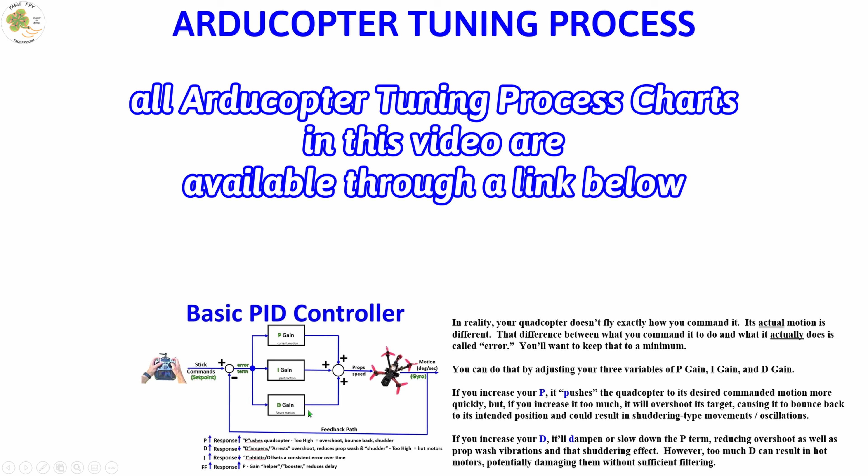So here's the basic Arducopter tuning process we'll be going through. First, we're going to start with the default PIDs that are provided in Mission Planner for 10-inch quads. Then we're going to do a little magic with our keyboard by pressing Alt-A. We'll adjust some parameters and conduct a hover test flight to see if we have any noticeable significant oscillations. If so, we'll adjust our PIDs if necessary.

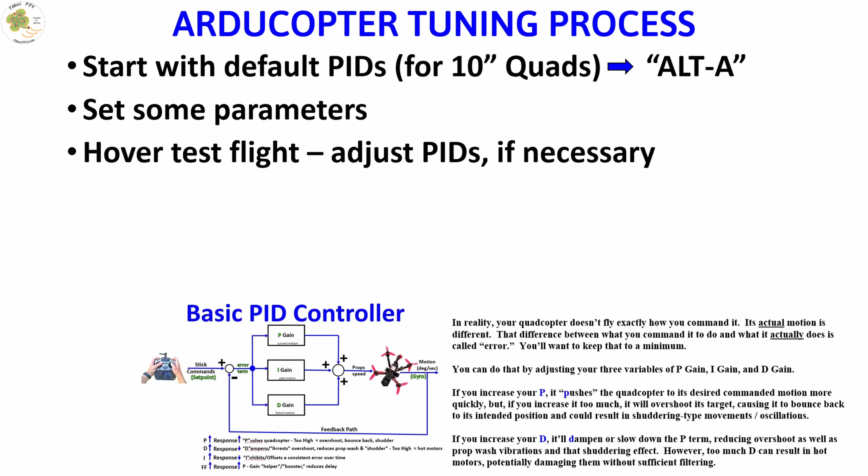Then we'll conduct an altitude hold test flight because we'll use that for our auto-tune, and again adjust any parameters if necessary. Then before we do our auto-tune, we're going to do one last test flight to see if our quad is able to self-level, because that's going to be important also for our auto-tune. Then we'll use the ArduPilot Autotune feature, which will automatically adjust our stabilized P term and also our rate P and D terms, along with our rotational accelerations.

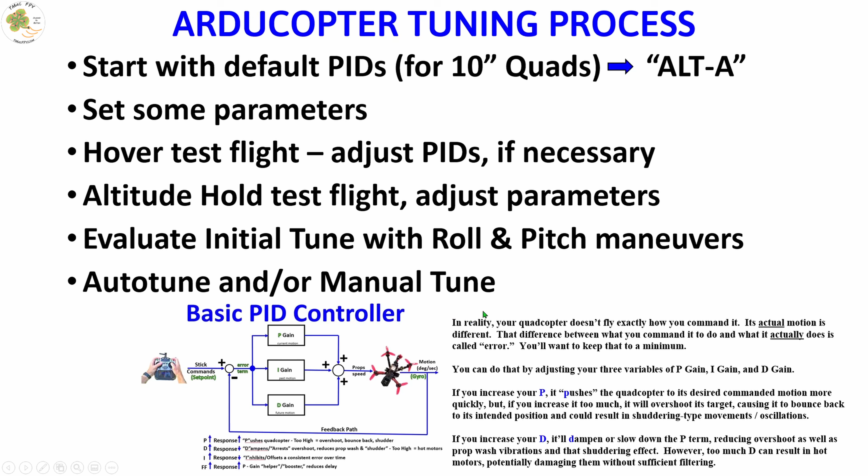Autotune could result in a tune you're happy with. However, more than likely, you're going to want to tweak a few of the values. So I'll go over a few of the tools in Mission Planner I used to manually tweak those values and come up with my final tune. As I mentioned, we'll start with the default PIDs. So let's go ahead and take a look at those.

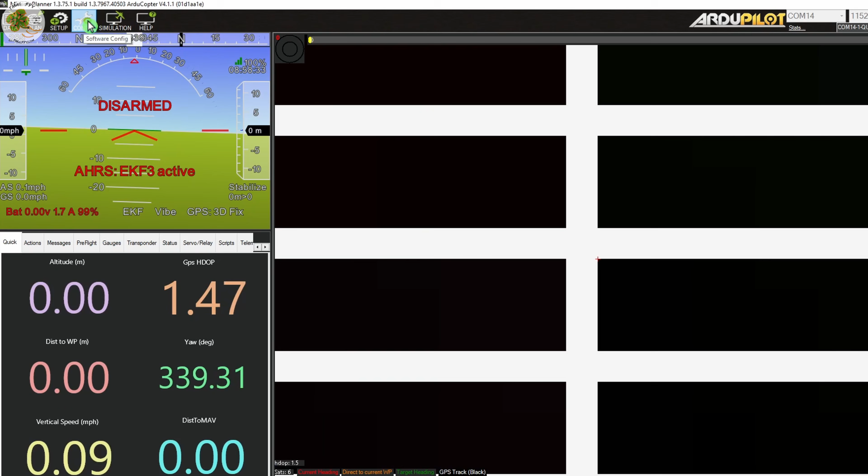With our quad connected to the computer through a USB cable, we go to Mission Planner, Config, Extended Tuning. These are the default PIDs and other values loaded into our Arducopter firmware. These are designed for a 10-inch quad, specifically the 3DR Iris. These may work well enough for you to perform an autotune, depending upon the size of your Arducopter. However, before jumping straight into an autotune, I'd highly recommend performing those other preliminary pre-autotune steps we just talked about, and I'll demonstrate here shortly.

Since we're using a 4-inch Arducopter for this video, I know I'm most likely going to have to change the PIDs from these 10-inch defaults. So what I've done for you is create this chart of example basic initial PIDs for Arducopters of different prop sizes, which should be a good starting point for an autotune. Of course, we'll still need to go through the pre-autotune steps we mentioned earlier to verify that they work.

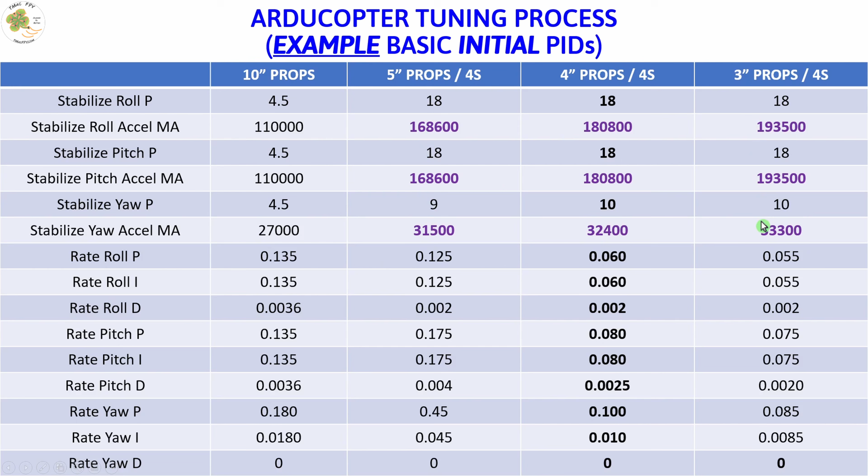I also want to point out there's a reason that these values are highlighted in purple. If we go to our next step, we also have Mission Planner keyboard Alt-A highlighted in purple. That's because when we connect our quad to Mission Planner, go to the Data tab, and on our keyboard press Alt-A, we get a pop-up window for a plugin designed by Andras Schaffer.

This little widget asks you a few questions about your prop size, battery cell count, max and min voltages. With that information, it automatically produces those values we saw earlier, highlighted in purple.

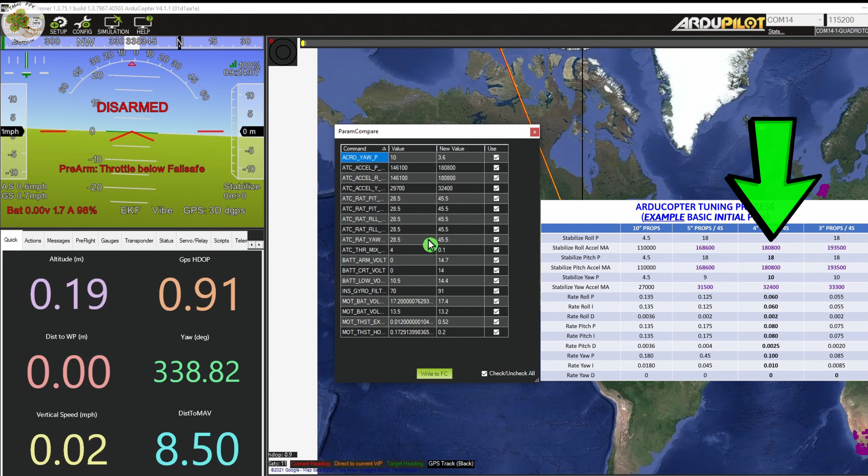Then all you have to do is click on the right button instead of searching for the parameter in the full parameter list and changing the values there. It's a real time saver. In fact, it updates more than just those values we saw highlighted in purple earlier. It also updates these we see on our next step, and some others we'll see later on.

This Alt-A plugin is currently being incorporated into the mandatory hardware setup section for the latest beta release of Mission Planner. So in the future, you won't even need to do Alt-A anymore. It'll be part of the initial setup process.

So now that we've updated some of our parameters using the Alt-A plugin, we still need to update some other values on our example PIDs chart not highlighted in purple. To do that, we go to our Extended Tuning tab in Mission Planner, change the values here, and then write the parameters.

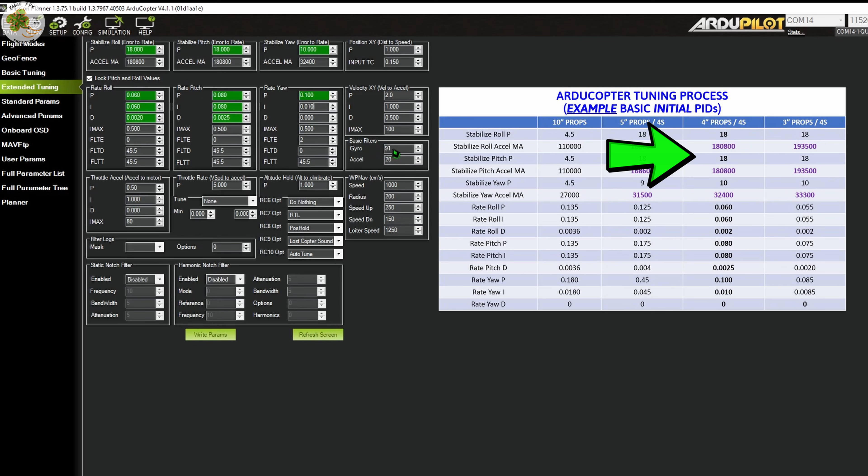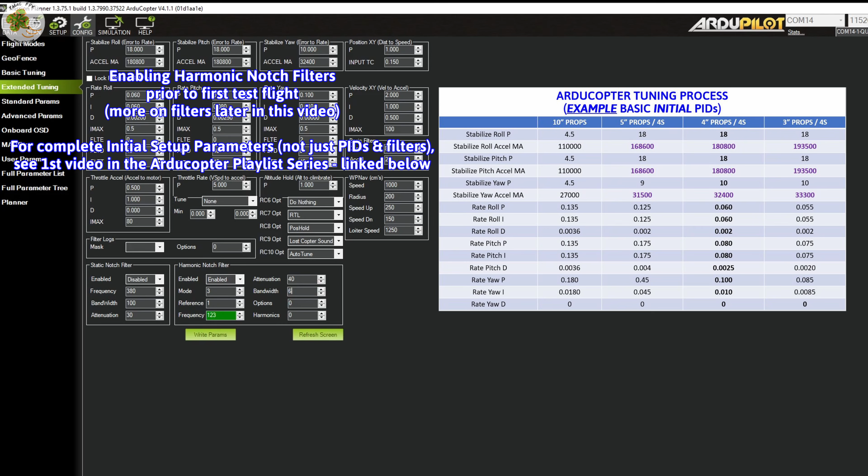Our next step is to conduct a motor spin test to determine our motor spin arm and motor spin min values. So let's go to Mission Planner, Setup, Optional Hardware, Motor Test. With your props off and the quad connected to Mission Planner through your computer, we're going to see the minimum throttle percent needed to spin the motors cleanly when the quad is armed just by changing these percent values up here.

Usually it'll be about 4 to 5%. You may want to bump it up just a little bit since the motors aren't spinning any props during this test. So we'll start at 5% and test motor A. And that spins fine at 5%. What if we dropped it down to 2%?

That works at 2%. What about motor B? Not so much. So we need more than 2%. Let's make it 3. 3 works for motor B. Works for motor C. And it works also for motor D.

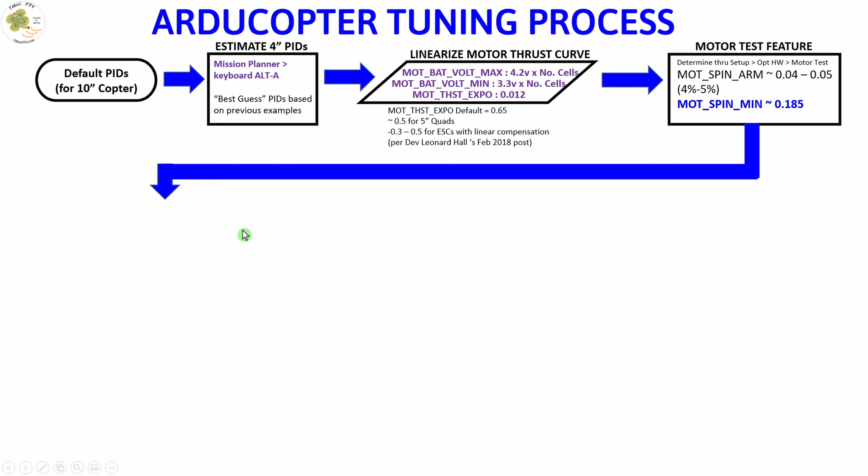Our next 3 steps consist of changing or verifying some parameters before we do our first test hover flight. Fortunately for us, the ones highlighted in purple have already been done through the Alt-A plugin we used earlier. The ones in black text are default values, which we're not going to change. So the only ones we need to do anything with are these parameters in blue text.

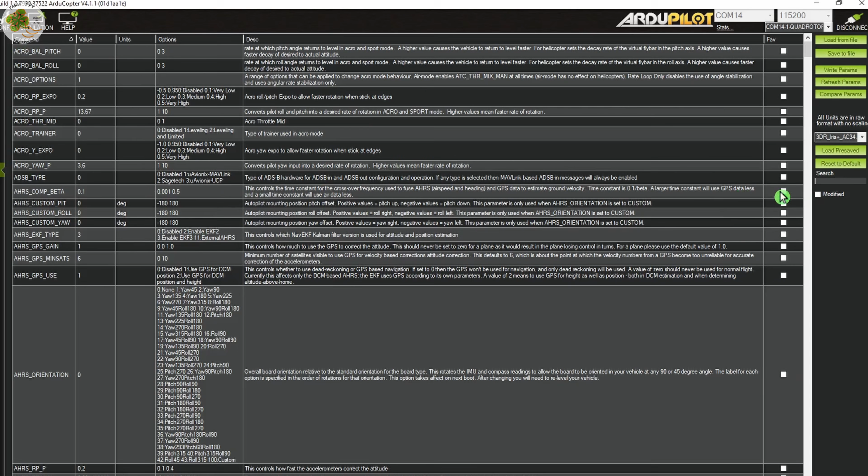First, we'll quickly look at these 5 using the Mission Planner full parameter list search bar with our Arducopter connected to Mission Planner. We just need to type in the first few characters of the parameter and it'll show up like that. Change the values and click Write Parameters. We'll do the same for motor thrust hover, where 0.20 was the default for our Alt-A plugin. I'm going to change that to 0.15

for our 4-inch Arducopter. By the way, this range of options is not hard and fast. These are what's highly recommended. However, you can go outside of these if you so desire. Yes. Yes. And then the last 3 with motor spin, I've already made the changes.

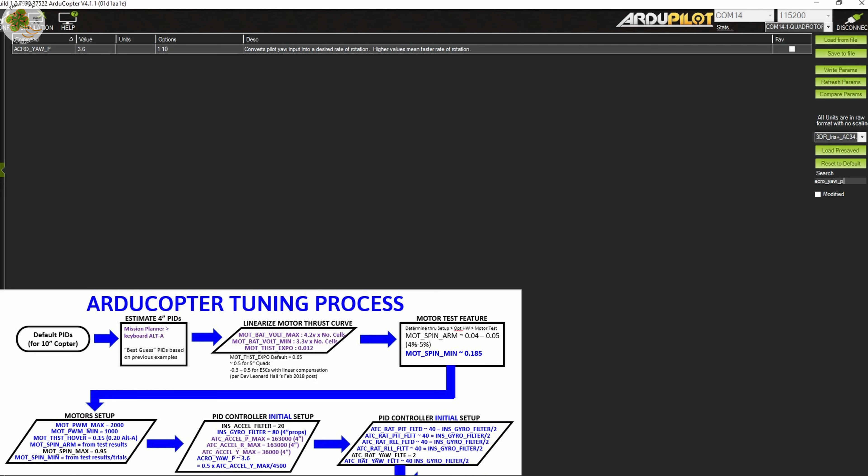While we're here in the full parameter list, we'll go ahead and do the Acro yaw P and verify that that is set to 3.6, which is what we want. It doesn't hurt to write parameters. And now we'll change these other parameters by going to our Mission Planner Configuration Extended Tuning tab and fill in our INS gyro of 80.

And then these 45.5s end up being 40, and our yaw FLTE is default of 2. So we just change these 45.5s to 40, which is half of our INS gyro frequency. And then we click Write Parameters, and let's go ahead and refresh them just to make sure that they've taken. And we see that our changes have been saved.

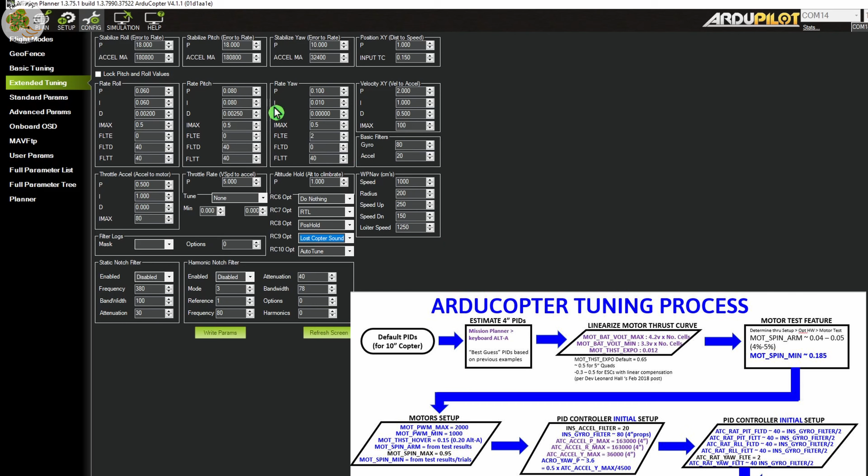Now it's time for our first test flight with our ATC throttle mix man set to 0.1, and we can verify that through our full parameter list that we were just in. We'll take her outside, take off in stabilized mode to an altitude of about 1 meter, and perform some small roll and pitch movements to look for any significant oscillations.

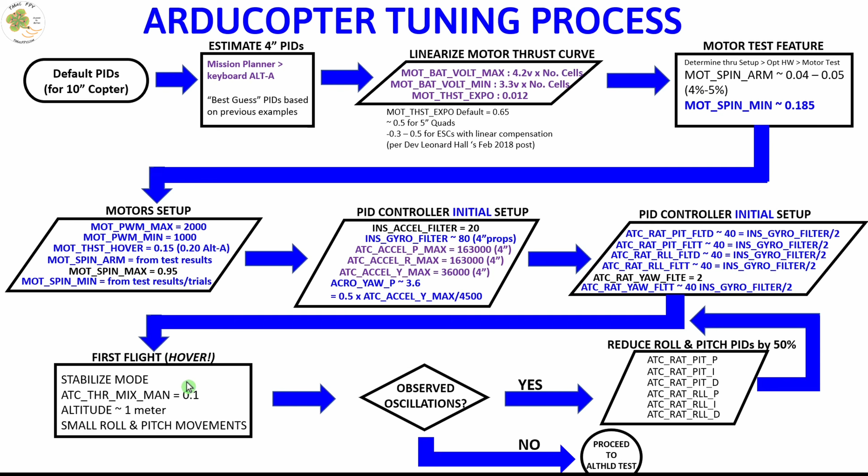If we don't have any, we can go on to our altitude hold test flight. If we do see significant oscillations, we'll reduce our roll and pitch PID parameters through the extended tuning tab by 50% from their current value and re-accomplish the hover test flight until we don't have any significant oscillations. All right, this is our hover test. I'm going to switch into stabilize mode.

Then I'm going to launch and gain altitude to about 1 meter. And we're going to check to see if we can hear or see any oscillations when we do some small pitch and roll maneuvers.

Sounds real smooth. Pitch maneuvers, roll maneuvers. And I don't hear or see any oscillations. That's a good sign. That tells me we're ready for our altitude hold test.

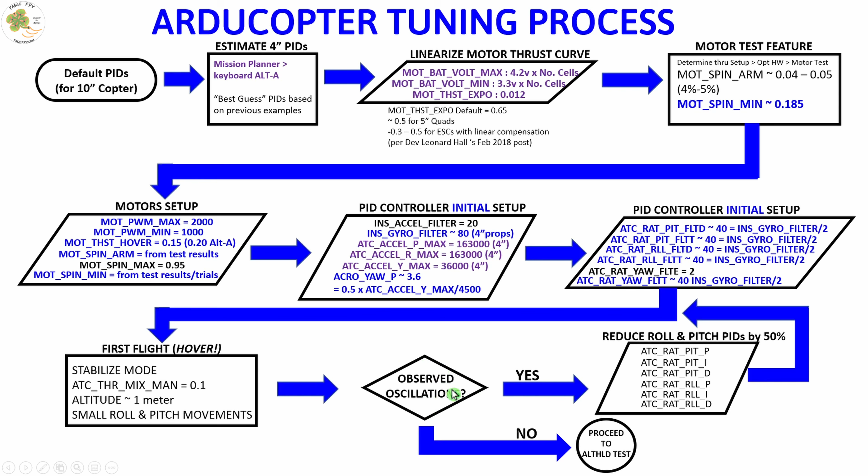Nice. All right, as I just mentioned, since we didn't observe any oscillations, we're ready to proceed to our altitude hold test. For our altitude hold test, we're going to need to set this parameter MOT_HOVER_LEARN equals 2. That's right, ArduPilot, specifically ArduCopter, has the ability to learn your throttle hover value, which is pretty amazing stuff, I think.

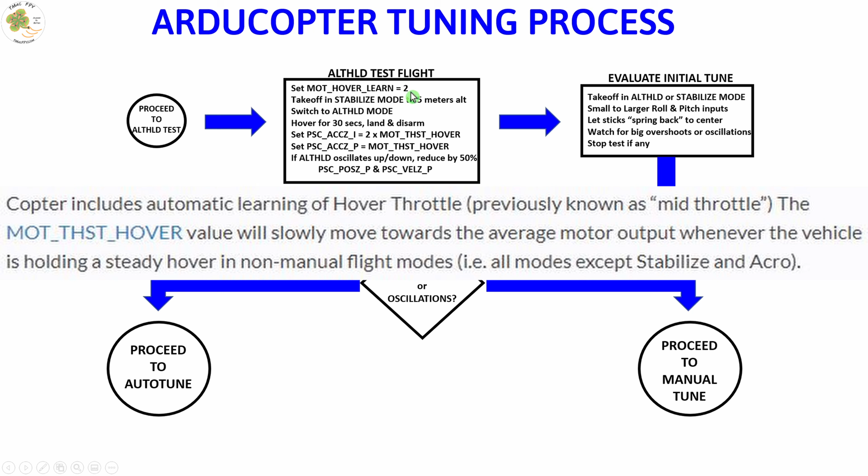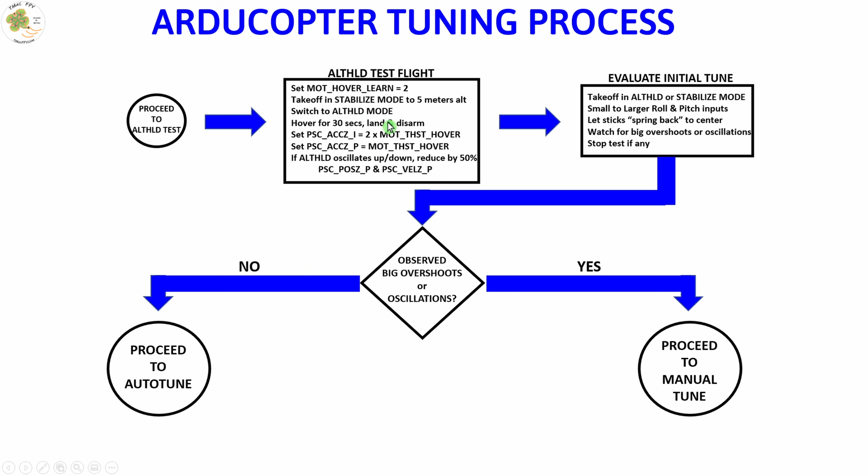We'll take off in stabilize mode to about 5 meters in altitude, switch to altitude hold, hover for about 30 seconds, land and disarm, and then we'll come back and set these two parameters also. If during this test flight we have oscillations vertically, then we'll reduce these values by 50% from what they were originally. In order to set any of these parameters, we go once again to our Mission Planner config full parameter list. Let's go ahead and do that now.

All right, since we've done this a few times before, we already know how to do this. We go to Mission Planner, config, full parameter list, search bar, MOT_HOVER, and it should come up, and it does, and we set this to 2, which is learn and save. Then we hit write parameters. Yes. Outstanding. Time for our altitude hold test.

All right, I'm going to launch in stabilize mode, get to an altitude of about 3 or 4 meters. It won't be 5. I'll switch it into altitude hold mode, and you should be able to see the altitude in the lower left-hand corner of the goggles DVR video. I'll hover for about 30 seconds or so, come in and land, and then we'll switch the parameters that we talked about earlier. I'm going to put my goggles on with my fat strap goggle strap.

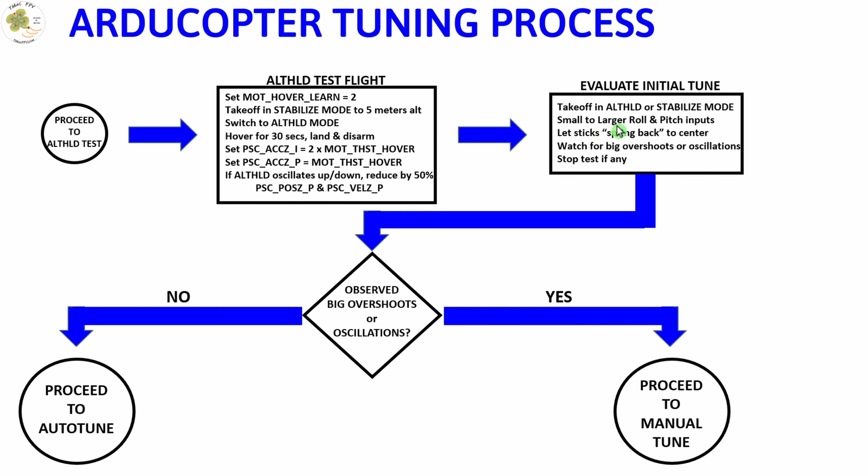All right, now we're ready for our self-level test flight. I'm going to take off in stabilize mode, get to a certain altitude, switch over to altitude hold mode. Then I'm going to input some roll and pitch maneuvers to make sure that the ArduCopter can snap back from those maneuvers, because that's the exact type of maneuver that Autotune is going to be using.

Here we go. Doesn't seem to be oscillating at all, which is good. Seems to be self-leveling fine. So we'll go ahead and set her down. Get ready for our auto-tune configuration.

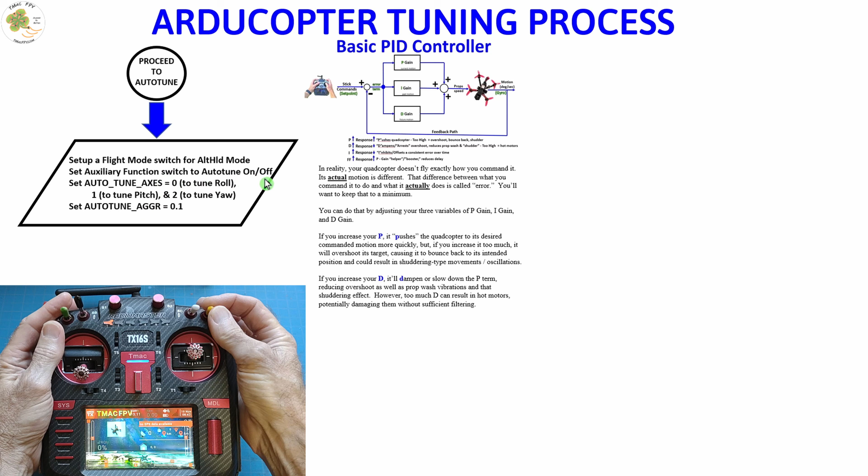Since we didn't have any significant oscillations during self-leveling, we're ready to go on to our auto-tune setup. We need to make sure that we've got a flight mode switch set up for altitude hold, which, as you saw earlier, we do. I went over how to set up flight modes in the first video of this playlist series. We're also going to need an auto-tune on-off switch. I've got mine set up in Mission Planner as an auxiliary function using channel 10.

To set up an auxiliary function on a channel, we go to our ArduPilot.org site, auxiliary function section, and we see the parameter we want is RCx_OPTION equals whatever feature we want from this long list. The X in RCx_OPTION is the channel number you'll be using. In our case, we'll be using channel 10, so our parameter we want to set is RC10_OPTION equals 17. How do we make that happen? The same way we've been setting up most of our other parameters, through the full parameter list search bar.

Now, of course, we also need to set up the switch in our transmitter, and you do that just like you would any other switch. Here you see my transmitter mixes page. Channel 10 is displayed as auto-tune. When I press to edit this channel, the next screen shows what I've filled in. I'm using switch D for my auto-tune switch, and I've set up a weight of -100 only because I want the channel high position of around 2000 in our radio calibration tab of Mission Planner to be when my transmitter switch D is in the forward or up position.

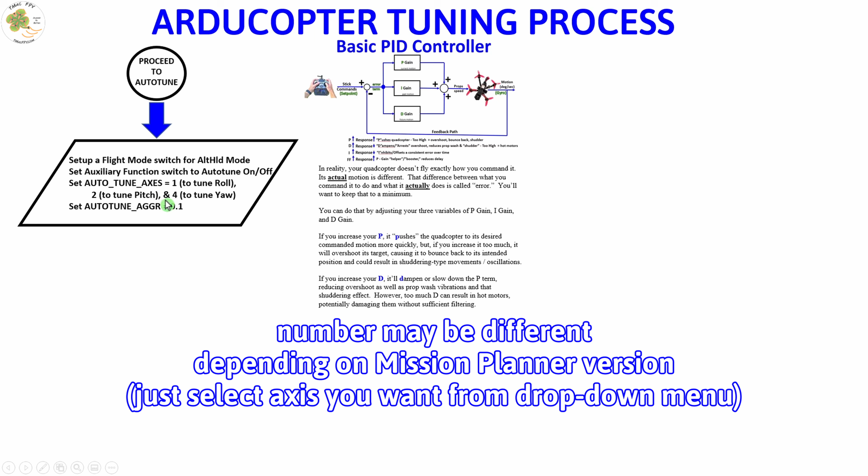This next statement talks about a parameter we need to set for which axis we want to tune during a specific flight. Now we could attempt to do all 3 axes in one flight. My recommendation is not to attempt that unless you're capable of flying with a very large capacity battery. Each axis can take several minutes to auto-tune, so I do one axis at a time. The process is exactly the same for each axis, with the exception of changing this number for the parameter. If you set the parameter equal to 1, the ArduCopter will twitch on the roll axis, which is a series of quick, short roll maneuvers. If you set it to 2, it'll twitch on the pitch axis, and so on.

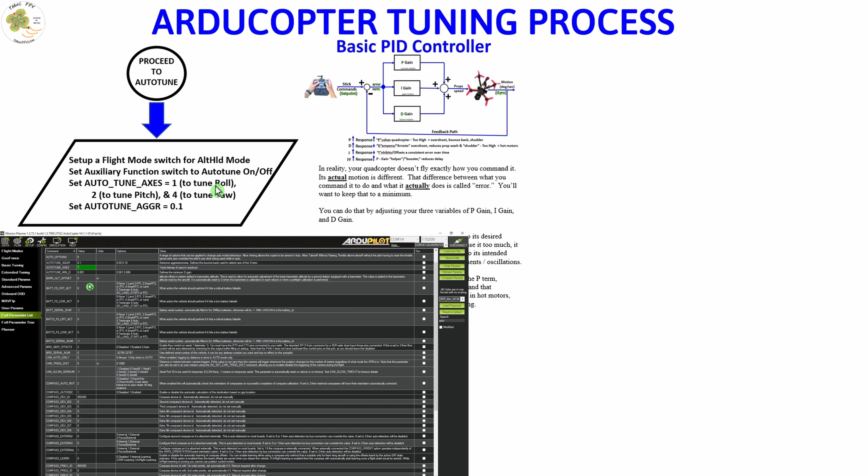Since the ArduCopter Autotune process is exactly the same for all 3, I'm only going to demonstrate one of the axes. For this video, I'll demonstrate the Autotune on the roll axis. So we'll go to our full parameter list and set Autotune axes equal to 1. And while we're there, we're going to ensure our Autotune aggressiveness parameter is set to 0.1. You could pick another option if you wanted to. Now that we've set up our parameters, let's take a quick look at the actual process we're going to do.

First of all, the ArduPilot site says to perform the Autotune with little to no wind in a large open area. They really mean that. Let me tell you why. During the Autotune process, when your ArduCopter is twitching, which are those series of short, quick maneuvers on each axis, it's going to drift. Every time you maneuver it with your sticks to keep it from drifting too far away, the Autotune stops. It will not restart until you let go of the sticks. If you're having to do this a lot because of wind, you won't be making any progress with your Autotune while your battery is running out of charge. I've actually gone so far as to schedule when I was going to do an Autotune based on the wind conditions by using a site called windy.com for my location.

You just type in your zip code or the name of the town you're in, and it gives you the wind forecast down here below. Just plan on doing your Autotune with as little wind as possible in an open area.

We're going to launch in either Acro or stabilized mode with our Autotune switch off. Then we'll go into altitude hold mode at a comfortable altitude. We'll flip the Autotune switch on and let go of the sticks. It'll start doing its thing, and you'll see progress messages on your goggle screen, or I suppose ground station if you're using one of those.

When it's finished, it'll say success, and all you have to do to save the new PIDs for that axis is land and disarm. There's also a way to try them out before you save them, and I'll refer you to this link for further information on Autotune.

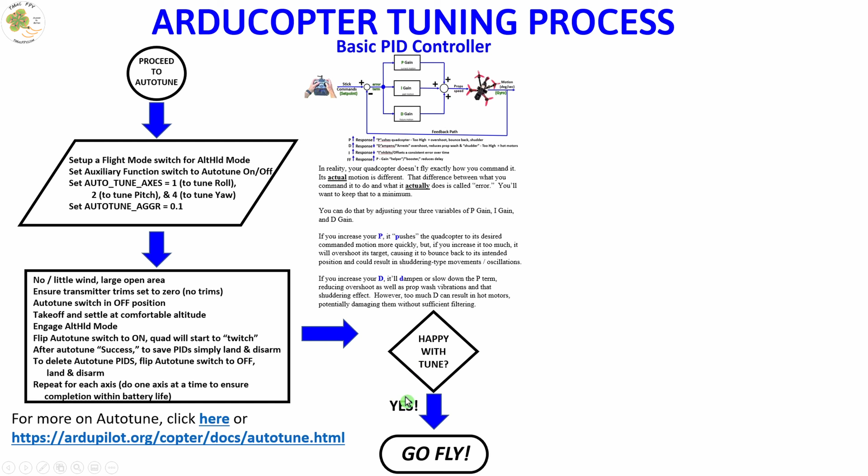If your answer is no, not really, then we can tweak the Autotune PIDs manually using a few tools in Mission Planner. You can try the basic roll and pitch tuning with the slider if you'd like. It'll be sort of a trial and error method of moving the slider around and flying with the results to see if you like it.

Or you can use the Mission Planner equivalent of Betaflight's Black Box Explorer. I'm going to show you the two tools I've used to dial in my final tune out of a lot that are available to you. First, you need to set up the ability to record your flight logs. My Matek H743 mini flight controller uses an SD card to record the logs.

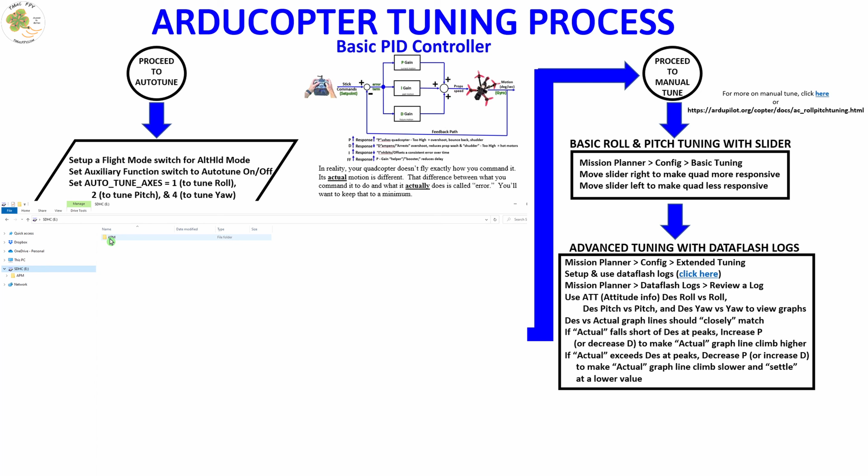Then you need to set the parameter LOG_BITMASK to record the values you want through the full parameter list search bar. These are the values I've selected. Of note, selecting attitude fast logs your Arducopter positional data on all three axes at the high rate of 400 Hz as opposed to a lower rate. Then after my flight, I grab the log off my SD card and save it to my computer.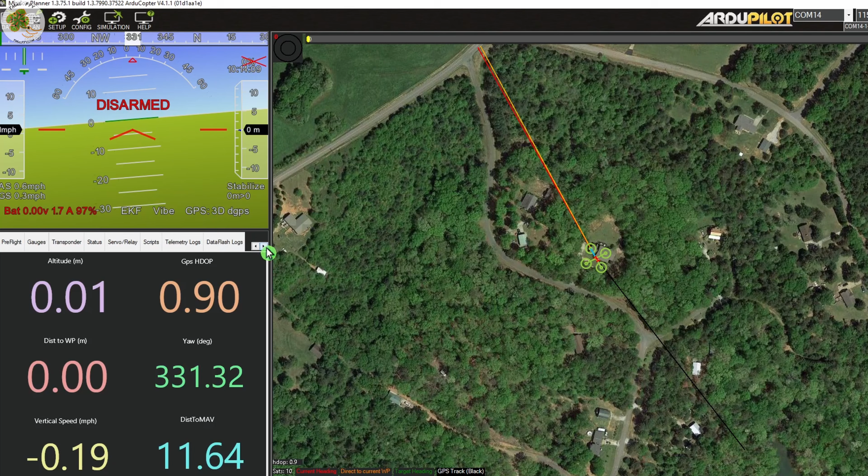Let me show you how easy it is to use the Dataflash log as a tool to help you improve your Arducopter tune. Open up Mission Planner. You don't even need the Arducopter connected to the computer. Go to your Data tab and scroll over to and click on Dataflash logs. Then click on Review a log. Grab the log from your flight which you've saved to your computer, and I'm using the flight log from our Arducopter in this video immediately after its Autotune.

Click on ATT, which stands for attitude, desired roll, and roll, which is your actual roll. It'll bring up their graphs for each in a different color. The desired and actual graph lines should closely match or overlay one on top of the other. If they're off by a couple degrees, that's usually okay, unless you want to get them absolutely perfect.

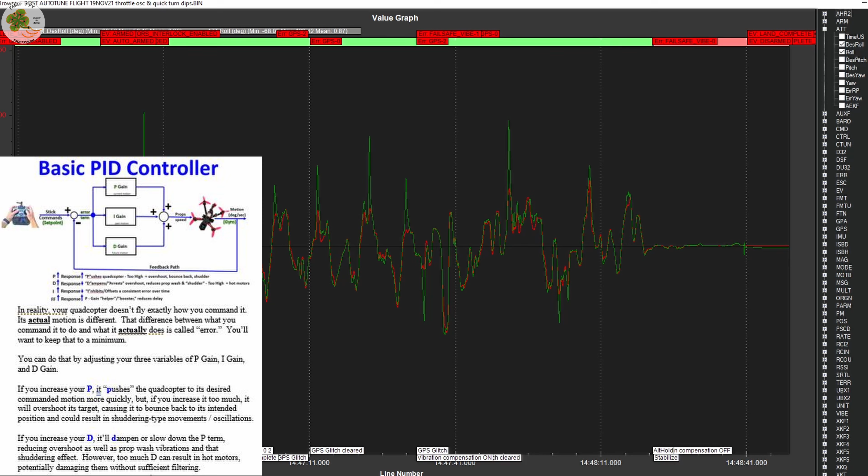Going back to the basic PID controller diagram on our chart, if your actual roll, shown here in green, consistently fails to climb up to meet the desired roll graph line in red, then you may want to increase your P gain by 5 to 10% from what it is currently, or lower your D gain by that same amount.

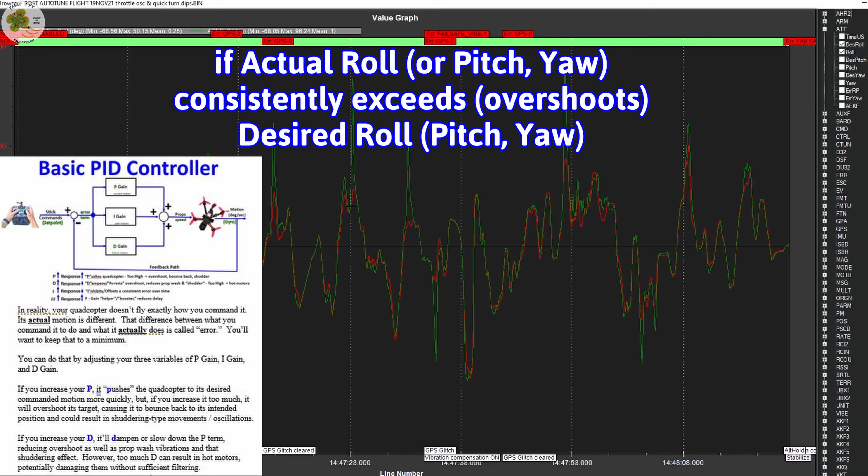What's important is the ratio of your P gain over that of your D gain, or your P to D ratio. So to correct this type of error, you'd want to increase that P to D ratio. On the other hand, if your actual roll graph consistently exceeds your desired roll at its peaks, you may want to do exactly the opposite. That is, lower your P to D ratio by lowering your P gain or increasing your D gain by 5 to 10%. This is the case on our roll axis.

These overshoots are also really apparent in flight as sudden, severe, uncontrolled dips in the direction of the commanded roll. So I'm going to lower our P to D ratio to get our actual roll more closely aligned with our desired roll. After you make your changes, go fly, record the flight log, and review it again to see if you've made progress. Continue this process until you're happy with your results.

You can do the same process for your desired versus actual pitch and desired versus actual yaw. Your goal is to get the desired versus actual graph lines overlaying one on top of each other as closely as possible. I'm going to show you one more thing before I reveal my final PIDs and take her out for a final flight. Arducopter has three main filters I'm aware of.

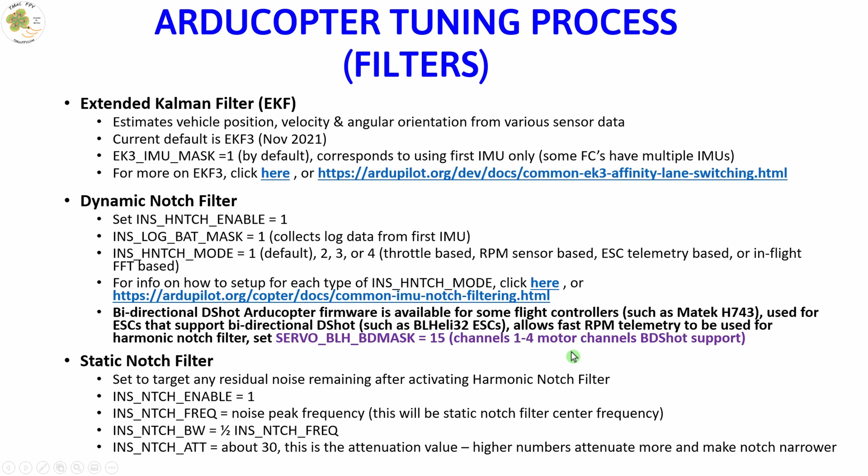The Extended Kalman filter, or EKF, and you can read up on that by going to this link. The Arducopter firmware also has a dynamic notch filter that you could read up on at this link. I've got my dynamic notch filter settings to 1, 1, and 3 for ESC telemetry based. Since I'm running bidirectional D-Shot firmware on my H743 mini flight controller, I've also got this parameter, SERVO_BLH_BDMASK equals 15, coinciding with the first 4 channels, which are the control signal channels. The third filter is the static notch filter, and I'll get to that here shortly.

Earlier, I enabled the dynamic notch filter, and you see that on the images of both the pre-Autotune and Autotune PIDs. I set its lower frequency limit to 123 Hz. Now I'm going to show you how I came up with that, and also how you can set up that static notch filter. Go back to Mission Planner, Data tab, and press Ctrl F on your keyboard. Press this FFT button, click on IMU batch sample, and load your flight log you saved to your computer.

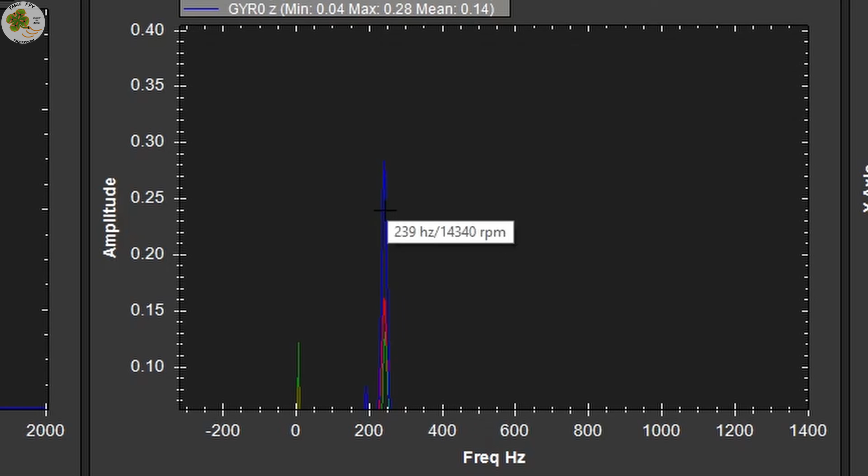It'll bring up 2 graphs. One is for your accelerometer, and the other is for your gyro. I'm just going to go over the gyro graph for you. Here's what it looked like before filtering. You see I've got peak noise from the motors at about 246 Hz. I want my dynamic harmonic notch filter to take care of that. The Arducopter site recommends setting your lower limit frequency to half your peak noise frequency. So half of 246 is 123. That's the dynamic notch frequency that I've set, with a bandwidth of half of that, or 62.

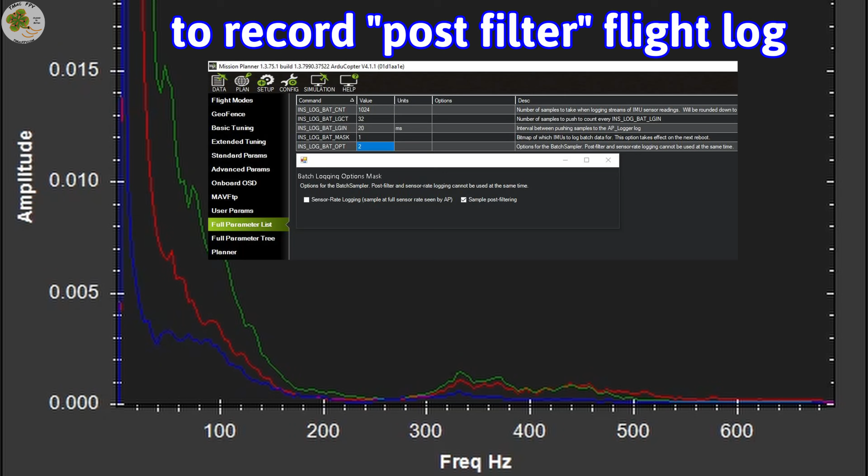Now, after you've set the dynamic notch filter and recorded a post-filter flight Dataflash log, you can view the results of the dynamic notch filter. Here you see it's working really well on the motor peak noise we used to have around 246 Hz. It's gone. Now you do see another little noise peak or two to the right at about 333 or 368 Hz. Looking at our vertical scale, it's really not that bad, and we could let it go. However, for demonstration purposes, I want to knock that out with a static notch filter.

So we'll set the static notch filter center frequency to that peak frequency. We go to our extended tuning tab, enable the static notch, plug in the center frequency, make the bandwidth about 100, and the attenuation about 30 dB. Write your setup. Now you know how to manually adjust both your PIDs and filters using ArduPilot Mission Planner along with your Dataflash logs.